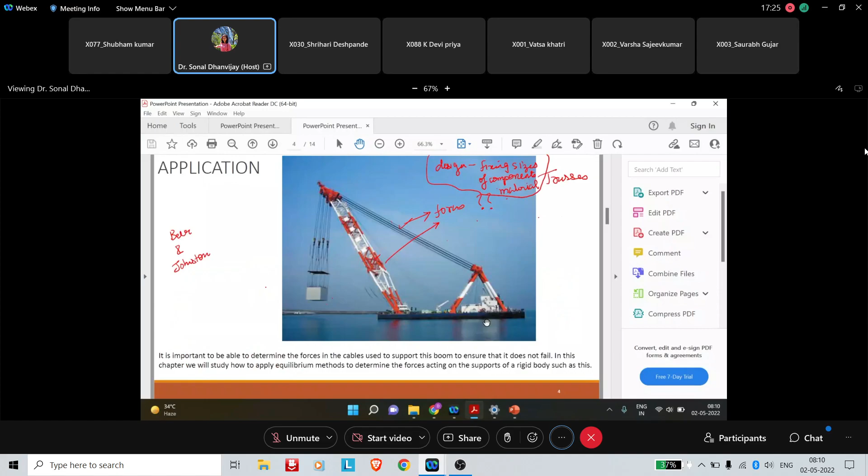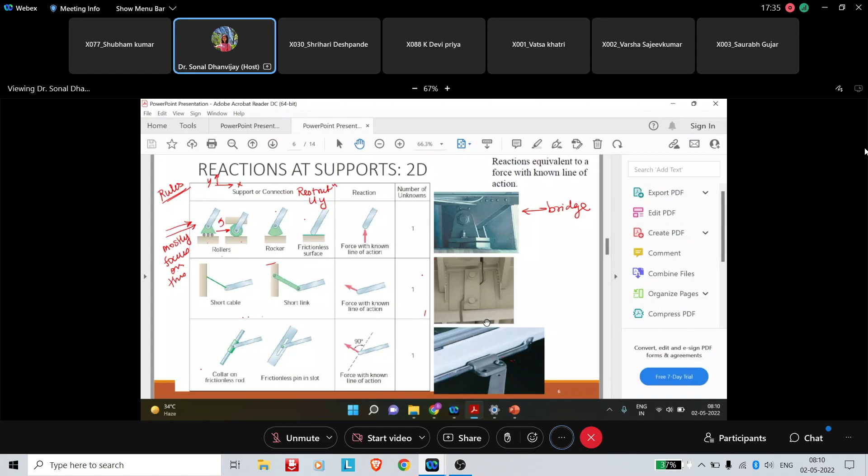Okay. So this is the last lecture. We were talking about equilibrium, equilibrium of rigid bodies. Then we talked about supports. So in 2D, if it is a roller, one reaction. If it is a hinge, then two reactions. And if it is fixed support, then there are three reactions. Okay. So we will try to solve some problems like that.

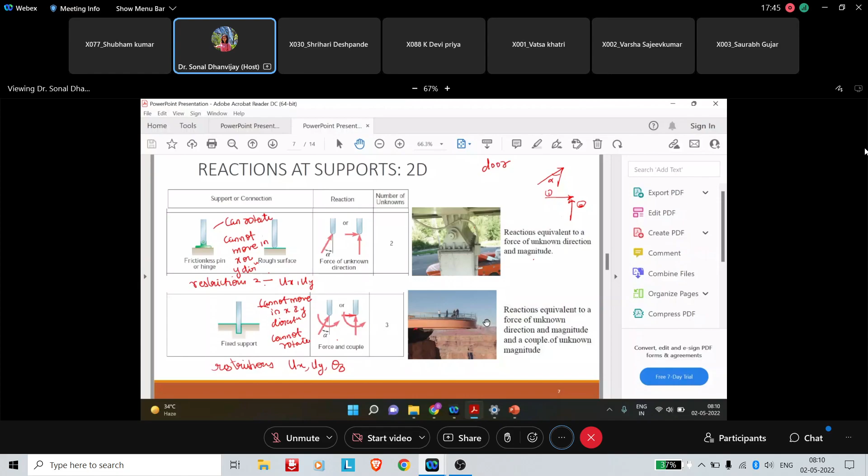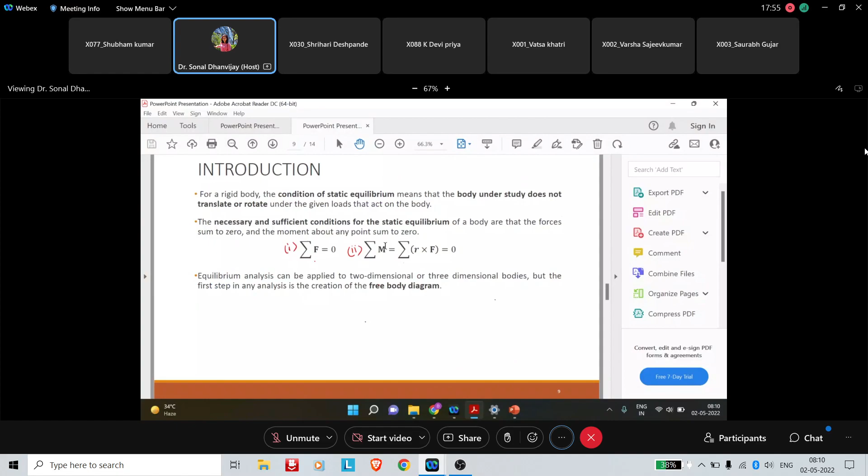So then again, condition of equilibrium, summation of forces equal to 0 and summation of moment equal to 0. Then we talked about how to draw a free body diagram. This free body diagram topic is recurring. Every chapter we will need this creation of free body diagram, and you will learn something new about it every time.

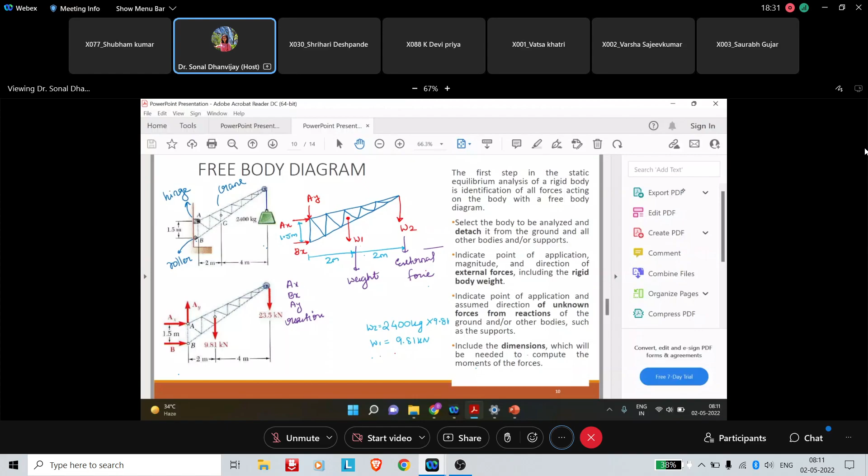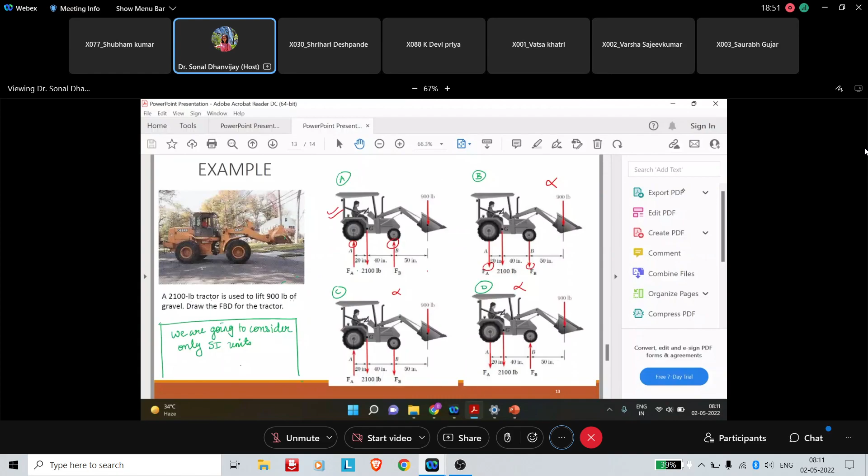So here what we learned is that first you need to detach the body from all the supports, and then you see how many loads are acting. Then you have to add the self weight, and wherever there are supports, you have to replace them by appropriate reactions. This is what we saw last class. And then one or two examples we spoke about how to draw a free body diagram. One of these I had asked you which is the correct one, and this tractor also.

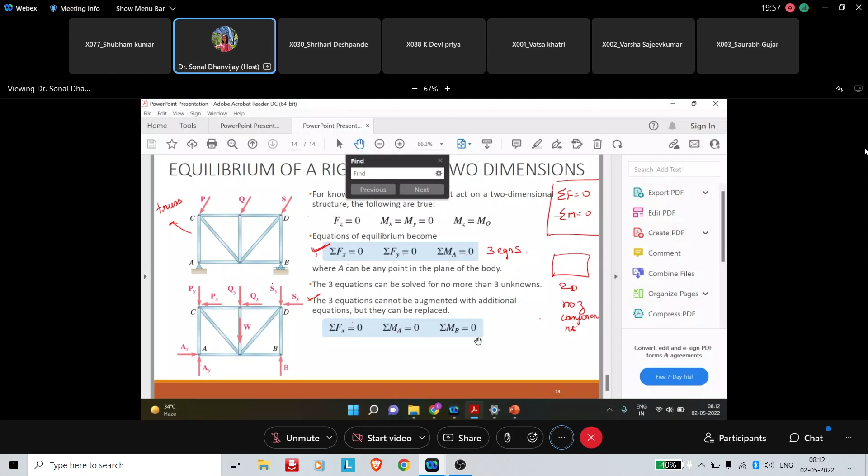If we need to solve for three unknowns, Ax, Ay, and the reaction at B, then you can either use these three equations, or you can even use summation Fy equal to 0 and these. When we come to an example like this, it will be more clear. The point I am trying to make is that you need three equations to solve for three unknowns. Whatever is the easiest and quickest way, that we will follow. So let me take some examples like that.

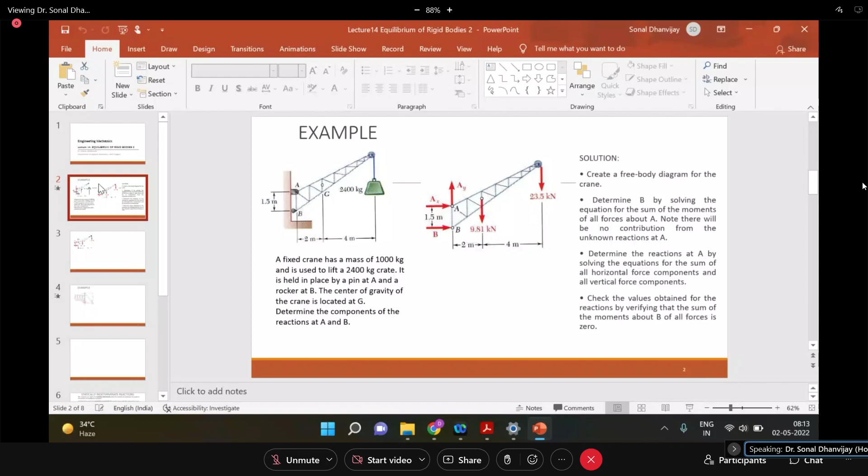What we have here. So last lecture we saw some problems, right? We were just trying to get the free body diagram. For this problem in the last lecture we saw how to draw the free body diagram. So now what I want to find out is: determine the components of reactions at A and B. What is the reaction here and what is the reaction here, the actual values you need to find out. So first thing would be creation of free body diagram, which we already saw how to do.

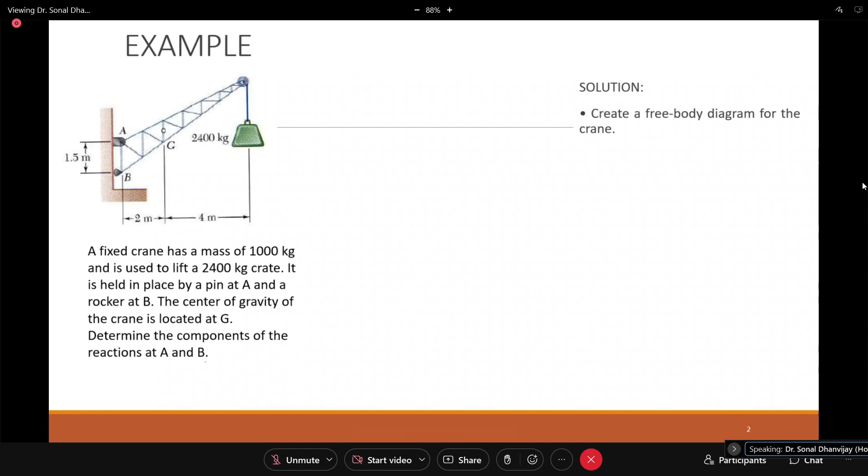Okay. So what is this? Fixed crane has a mass of 1000 kg. Okay, so the 1000 kg into 9.81. So that is kilonewton; in kilonewton you are writing that. And then again, this 2400 kg. So 2400 kg, if you convert it into kilonewton, you will get this value.

Okay, so again, SI units we are using. So it's better if you convert everything to either Newton or kilonewton. So now how to solve this? Either you can take summation of moment of all forces at A equal to 0. Then these two forces AX and AY won't produce any moment at A because they are passing through A. So in that equation you will just have one unknown B, so you can quickly find B. Okay, so there is one strategy like this.

Suppose you take summation of moment at A equal to 0; that will give you reaction at B. Then if you do summation Fx equal to 0, this is known, so only one unknown is there, so this will give you Ax. And then again, if you do summation of Fy equal to 0, this will give you Ay because all the other forces are known. Okay, so this is one strategy. You can even take another approach. Any three equations you can solve, but this is the quickest way to solve the problem.

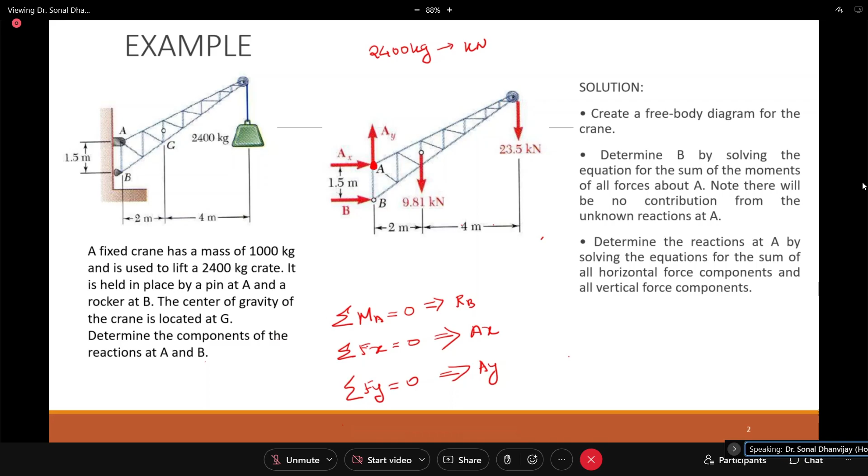Okay, so this you can read later when you go back. Let me just jump into solving the problem. So I want everyone to do summation of moment at A equal to 0 and find the value of reaction at B.

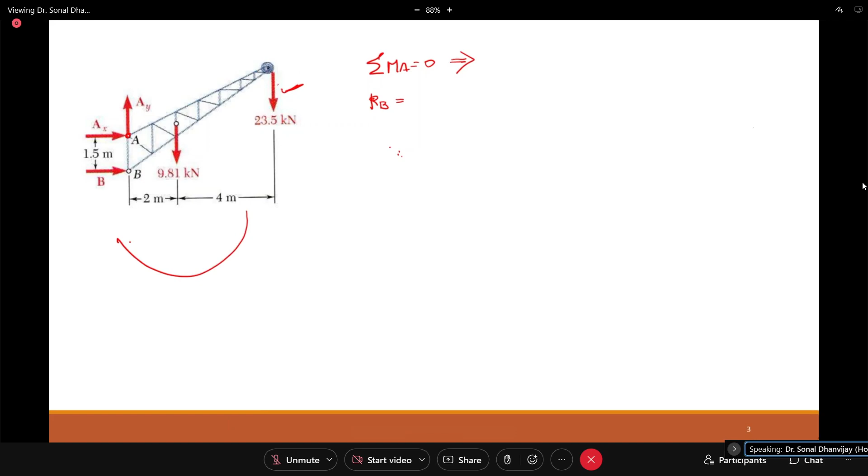I'll do the first one for you. If we do summation of moment at A equal to 0, let us take one force. So this is 23.5. This force at this point is producing a clockwise moment; clockwise is negative. Then force into distance. Distance is 6 meter. So this is for this force. Then take this force; the distance is 2 meter. Again, this force at this point is clockwise, so minus 9.81 into 2. These are the two forces.

Now these two forces won't produce any moment at A because they are passing through that point. Then this one, RB at this point. So it is anti-clockwise, so positive. RB into 1.5. So RB you can find out. Any doubt or confusion you can ask me.

Chalo, calculate this fast. This is a one-step solution. Roll number 91, Srushti, I want an answer from you. Srushti, you there? 92, are you there? Okay, Raghav has sent me one answer. 91, 92, 93, any of you? Please don't be virtually present in the class, otherwise you won't be able to perform properly in the exam. 94, 95 are absent. Okay.

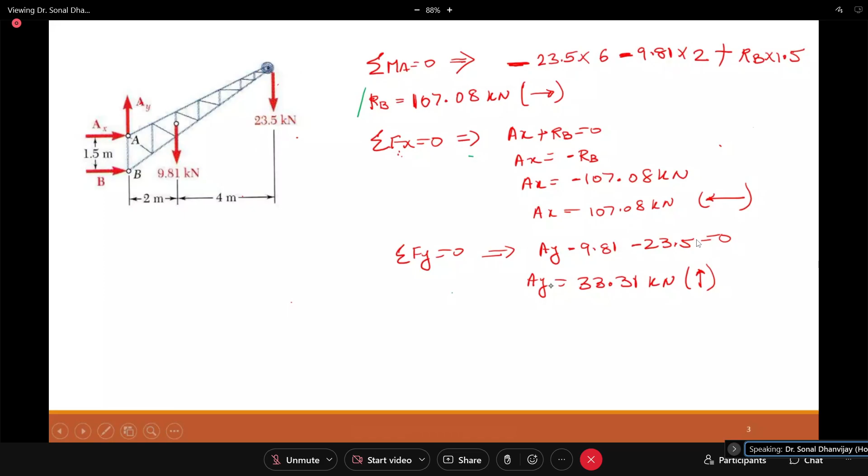Okay, I wanted to highlight this, but somehow my pen is not allowing. Anyway, so this is your answer. This one, and that one. RB, AX, and AY will be your answer because they are asking: determine the components of reactions at A and B. So you have to find how many reactions are there at A and B, however many reactions there are.

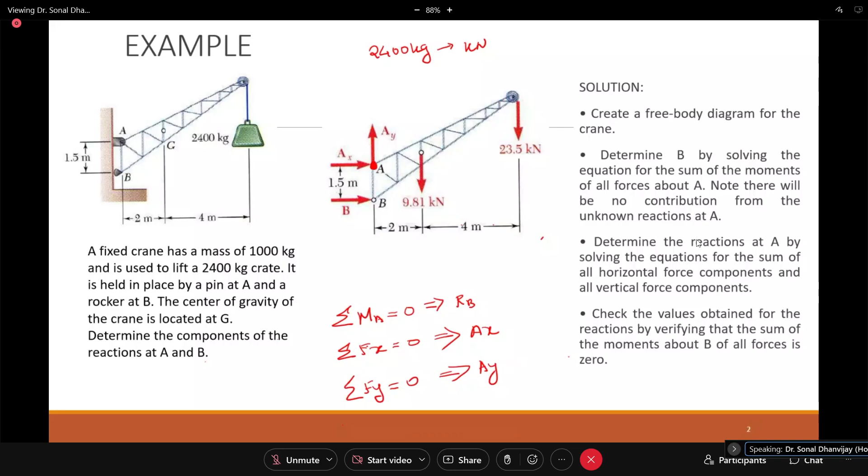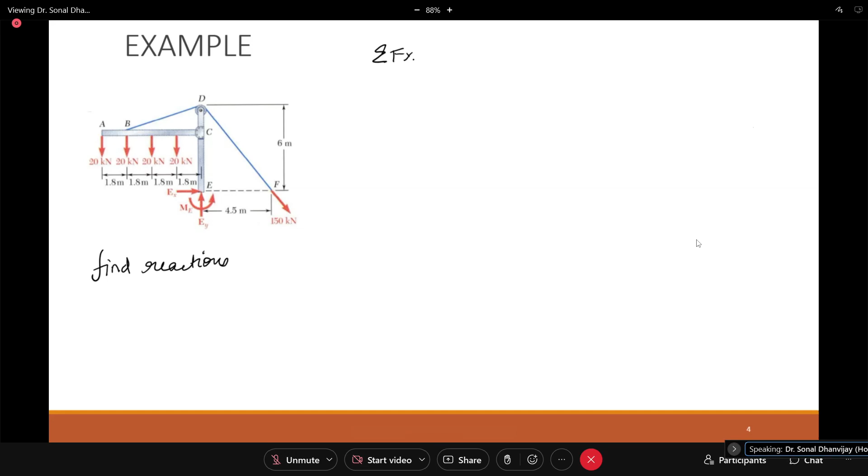If you take summation Fx equal to 0, this will give you Ex, because in the x direction there will be some component of F and that will negate your Ex. If you do summation Fy equal to 0, you will get Ey. And if you do summation of moment at E equal to 0, you will get ME. So you just need to do these three calculations and you can find that.

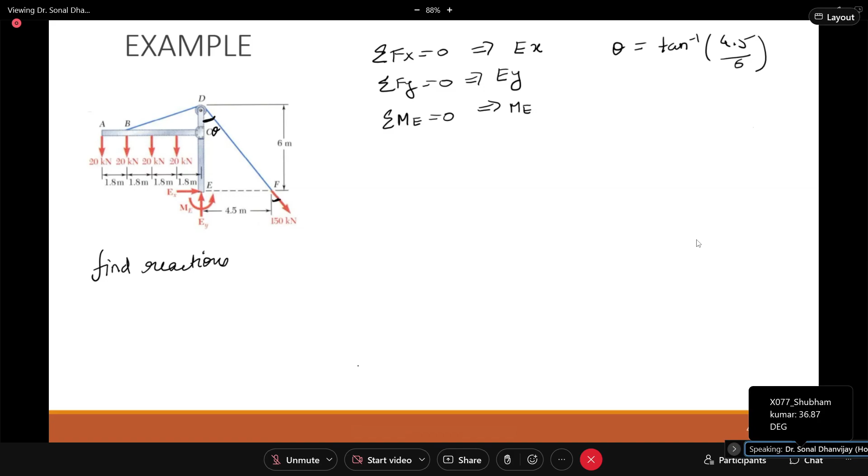So now the first thing here, you need to find this angle. Then only you can go about this equation. You need to resolve this 150. So that theta, if you take this theta here, the same theta will be here. That theta you can take as tan inverse 4.5 by 6. Same theta can be here and then you can find Ex. So 36.87 degrees.

Then you can write this equation for Fx: Ex plus 150 sin theta, so sin 36.87, equal to 0. So the Ex value will come as negative. That means your Ex is towards the left. Then you can simply do summation Fy equal to 0.

If you do summation Fy equal to 0: Ey minus 150 cos 36.87 minus 1, 2, 3, 4, 20 into 4. So Ex and Ey values, you can calculate all three values.

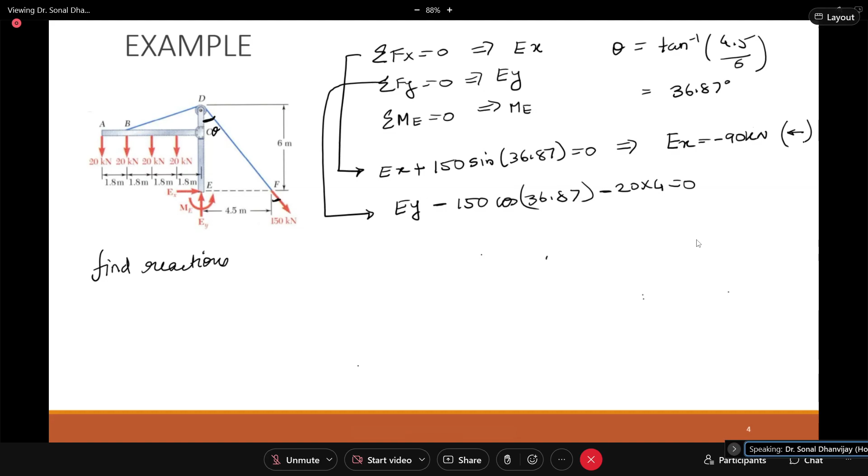Ex, you are telling me it has come as 90. So Ex is equal to minus 90 kilonewton. So this is like that. Ey, you are telling me 200. And it is not negative, right? So it will be up.

Then moment at E: ME is 180 kilonewton meter. So this is coming as positive, right? 180 kilonewton meter is coming as positive, then you can just write it like this. You can write it is anti-clockwise, or you can write it in full also, anti-clockwise.

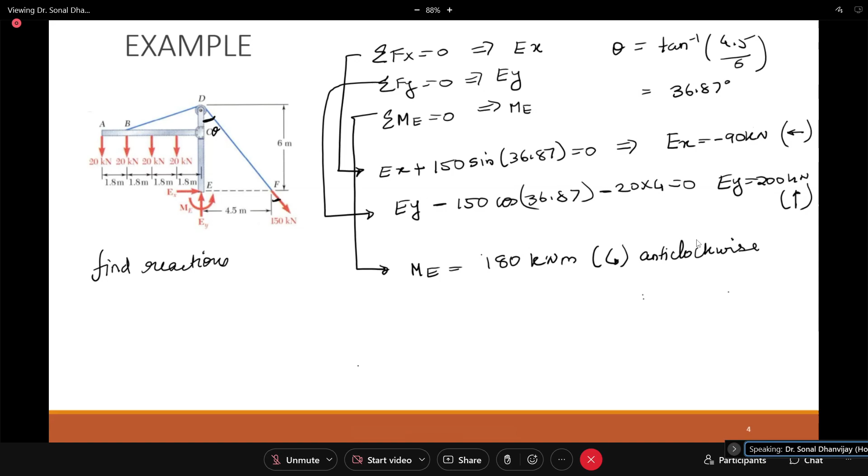So in the exam, even in a lesser time, you need to find out these reactions. So please practice this. I'll take one more practice example. Let me just see what I have here. Okay, before that, let me introduce one concept to you.

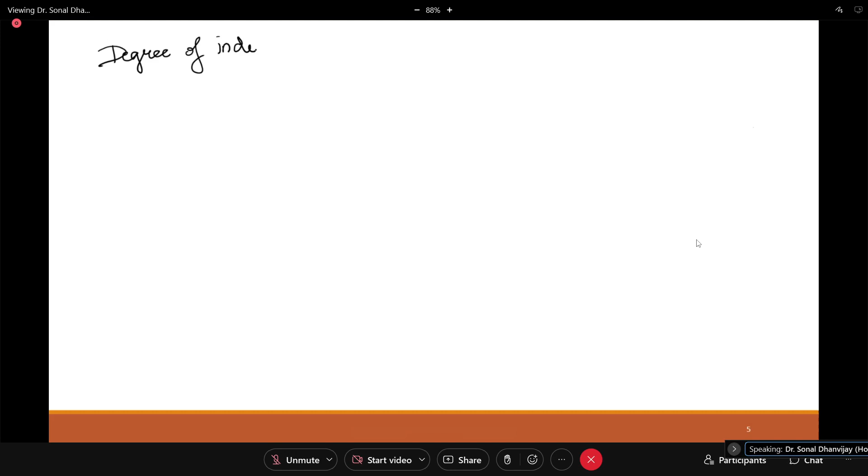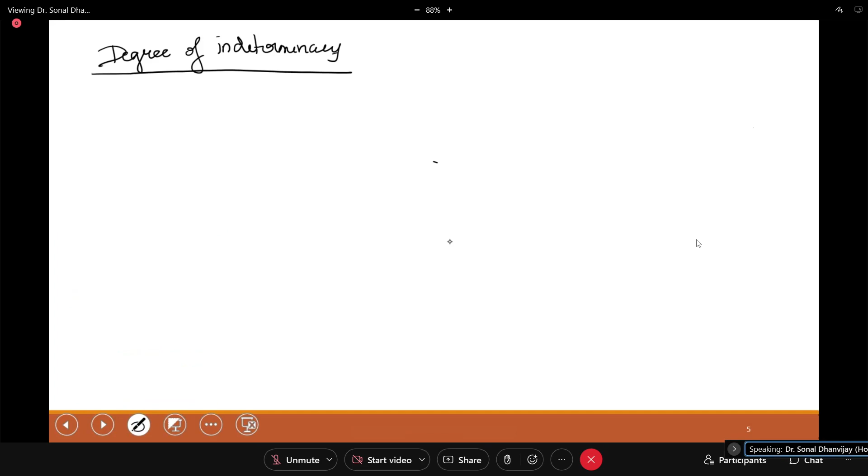So there is this concept of degree of indeterminacy. We will come back to this one more time when we talk about trusses, in chapter 8 or 9, but at this point you should be aware of what this is. So degree of indeterminacy of a structure is number of unknowns minus number of equilibrium equations.

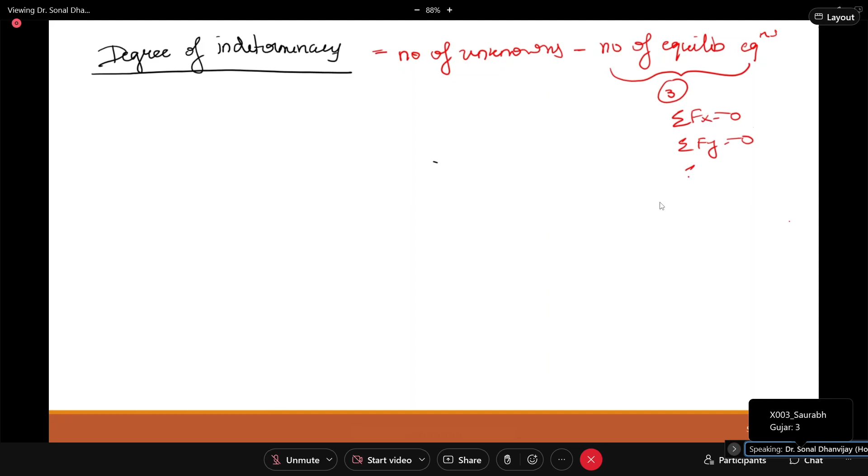So in 2D, how many equilibrium equations do we have? We just discussed it. We have 3: summation Fx, summation Fy, and summation of moment at any point. Or sometimes you might use summation of moments at 2 points and only Fx. They are variable, but only 3.

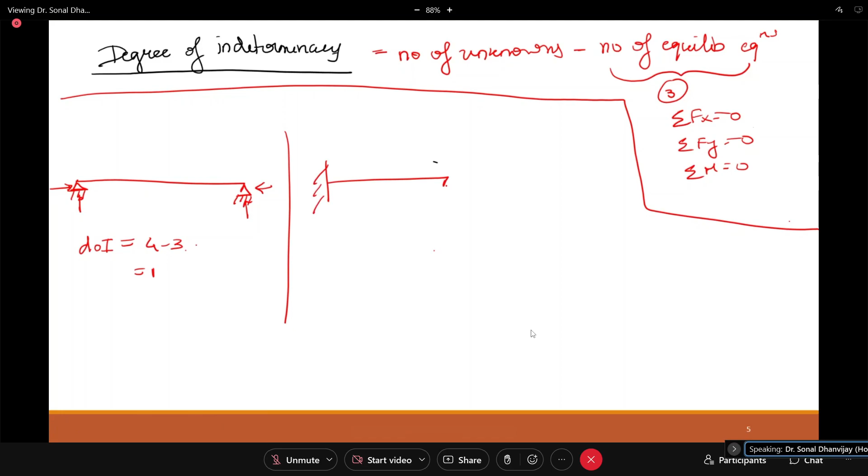So from this definition, if I ask you, these two are hinge supports. So what is its degree of indeterminacy? I am just calling it DOI. 1. Yeah, because there are two reactions at each support, so 4 minus 3, that is 1. Suppose this is a fixed support and there is a hinge. Then 2.

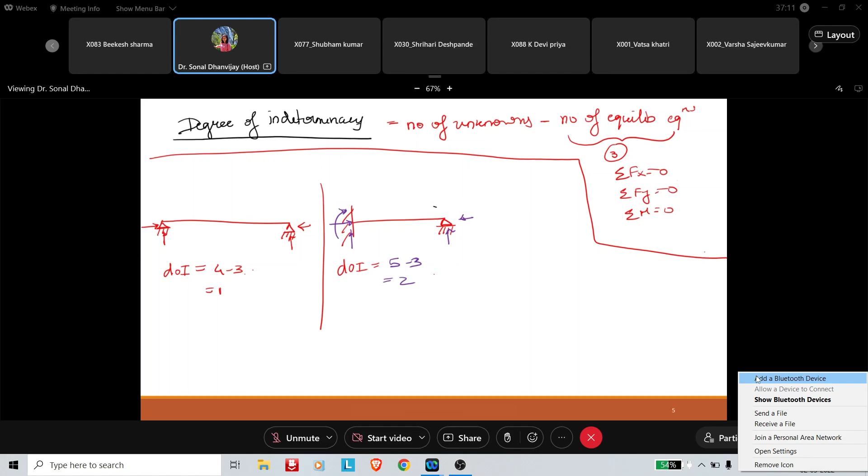5 minus 3, that is 2. Because 1, 2... structures. Okay, these two are indeterminate because the number of unknowns is more than the number of equilibrium equations. So we are lagging behind the equilibrium equations. In this case, if I somehow get one more equilibrium equation, then I will be able to solve the problem, in the sense I'll be able to find the reactions. In this case, if two more equations are available somehow, then I will be able to find the reactions.

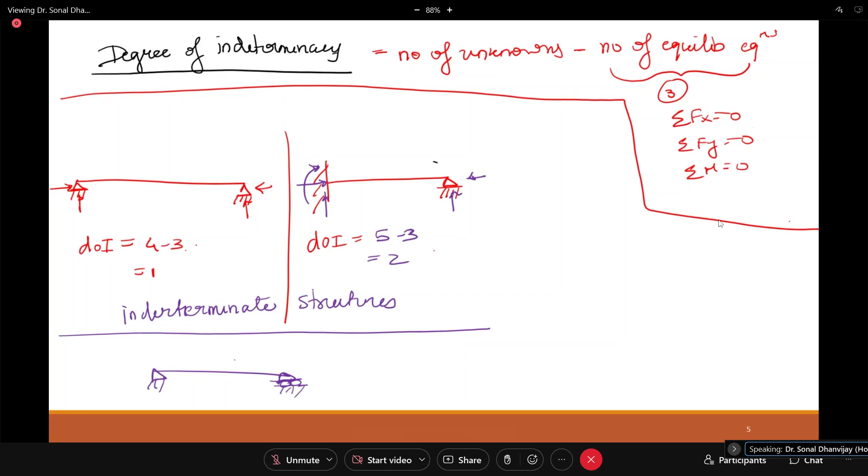So these two are indeterminate beams, or indeterminate structures. So usually in our case we will be solving some problem like this. Here, what is the degree of indeterminacy for this problem I have drawn? There is a roller, there is a hinge. 0. Okay, that means this is determinate. You can even talk about this: if this is a fixed support, a cantilever, with no support here. So these two are determinate structures, and these are in our scope. Indeterminate structures are not in the scope of your syllabus, but at least you should know what determinate and indeterminate structures are.

Whenever we want to solve indeterminate structures, that means we want to find the unknown reactions, more equations are needed. Here one more equation is needed. Here two more equations are needed. Those are called compatibility equations. In your higher semesters, you will learn more about that. But for the scope of this syllabus, we are going to focus only on determinate structures.

Yes, there was some question. Ma'am, I didn't understand the fifth unknown. That is moment. You understood that if the number of unknowns is more than the number of equilibrium equations, then the structure is indeterminate? Understood, ma'am. Okay, so where are you having a problem, this fixed one or the second one? The second structure, ma'am. Okay, 5 minus 3.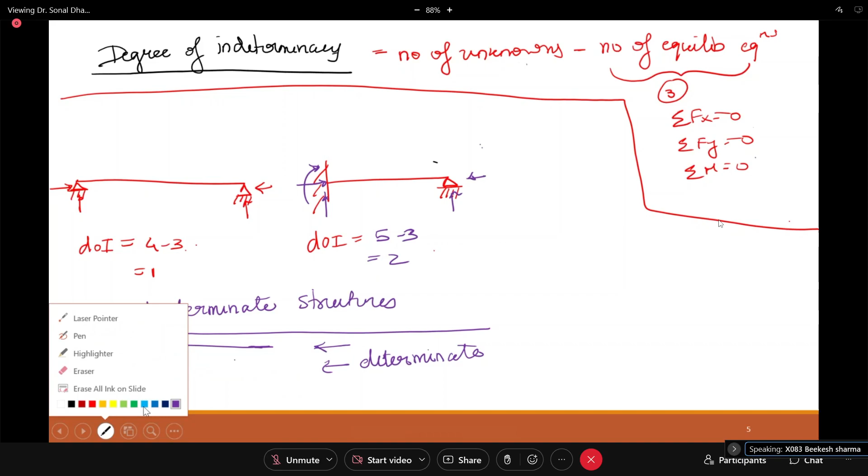Here this is a hinge and this is a roller. At the hinge there are two reactions, 1, 2. At the roller there is one reaction. So our DOI is number of unknowns 1, 2, 3 minus number of equilibrium equations, which in 2D will always be 3. 3 minus 3, that is 0. Not this one, ma'am, the upper one. Okay, the upper one. For this one, it is 1, 2 and 3, so 3 reactions, 3 unknowns, 3 equilibrium equations, DOI 0. Whenever there is a fixed support, you have 3 reactions.

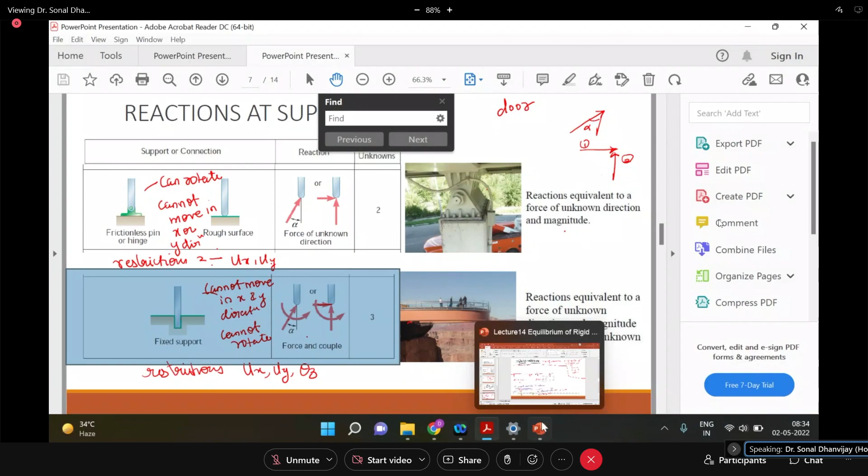So whenever there is a fixed support, there are 1, 2, 3 reactions. Do you understand this? No, ma'am. We discussed the same in the last class also, right? Just 1 minute. This is a fixed support, so here it is fixed. Whenever there is a fixed support, there are 3 reactions, 2 forces and 1 moment. The fixed support is usually represented like this.

Whenever it is like this, this is a hinge. A support like this is a roller. This support is fixed, so there are 3 reactions. Here there is a hinge, so there are 2 reactions. So 1, 2, 3, 4, 5, total 5. And the number of equilibrium equations in 2D will be only 3. So 5 minus 3 is 2. Understood, or is there some more confusion? Understood, ma'am.

So where was I? I was telling you that in your first year engineering mechanics syllabus, we will be considering only determinate structures, meaning the number of unknowns will always be equal to the number of equilibrium equations. That way you will always be able to solve the problem completely, in the sense of finding the unknown reactions. In this case, we need one additional equation because there are 4 unknowns and only 3 equations. In this case, we need two additional equations. Those additional equations usually come from the conditions of compatibility. So it is not that the problem is not solvable.

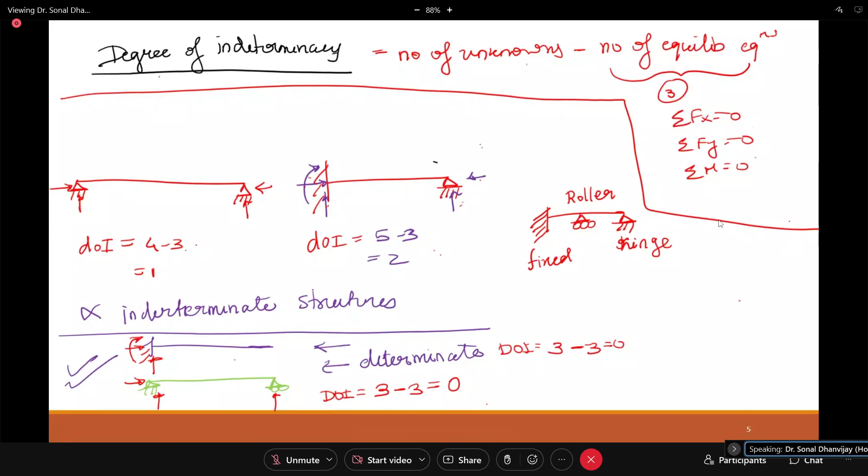Statically indeterminate reactions. So you can say the structure is indeterminate, or we can use the similar terminology, statically indeterminate reactions. Reactions are said to be statically determinate when the number of unknowns is equal to the number of equilibrium equations. This topic might be a bit confusing for you.

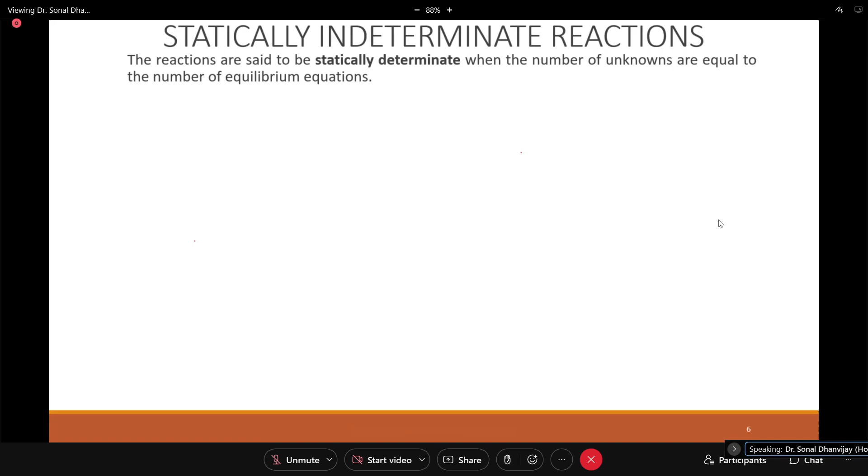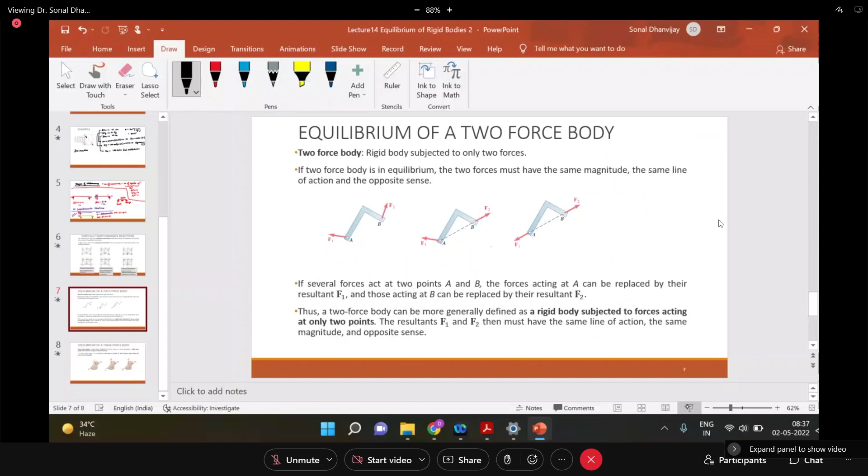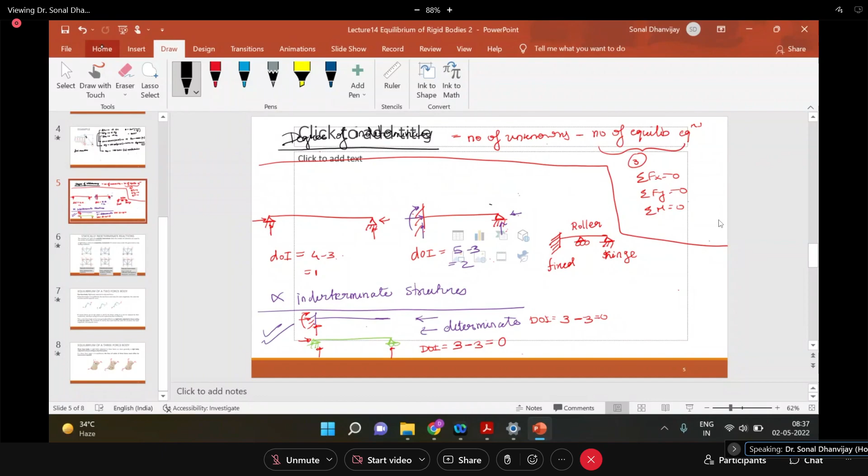Okay, I'll come back to this slide after some time. I don't want to confuse you. Let us focus. While we are on this, let me take one or two problems, so it will be easier for you. Because if I talk about the constraints, you might get confused. So let me tell you something else first, then we can come back there.

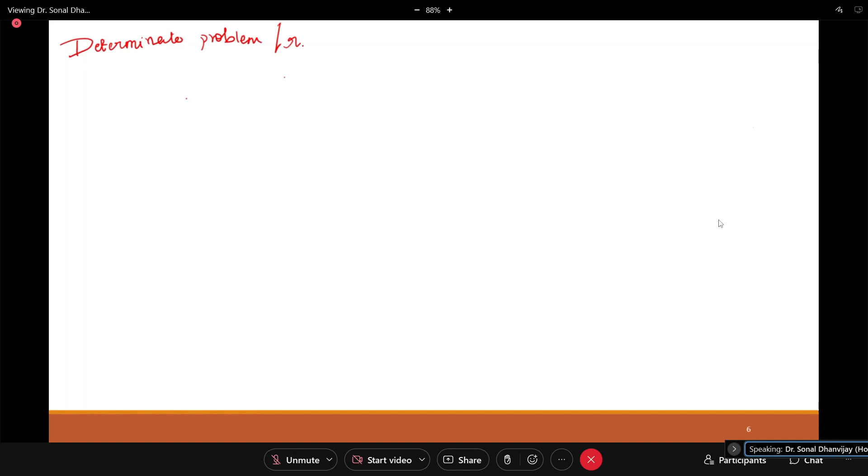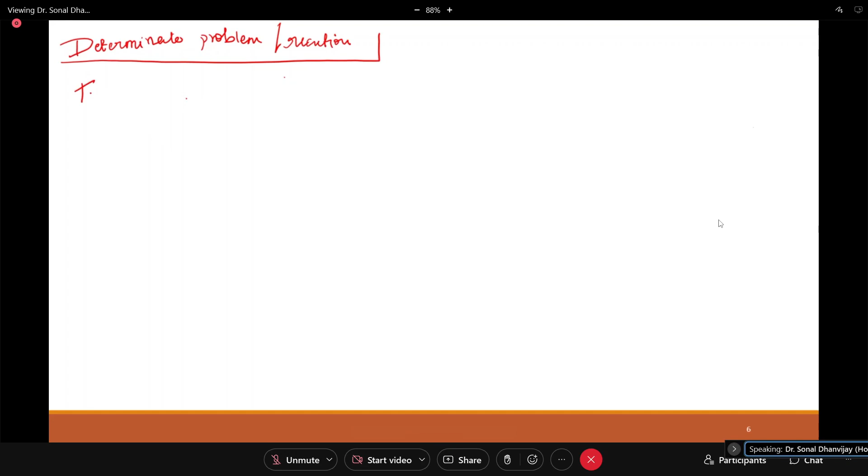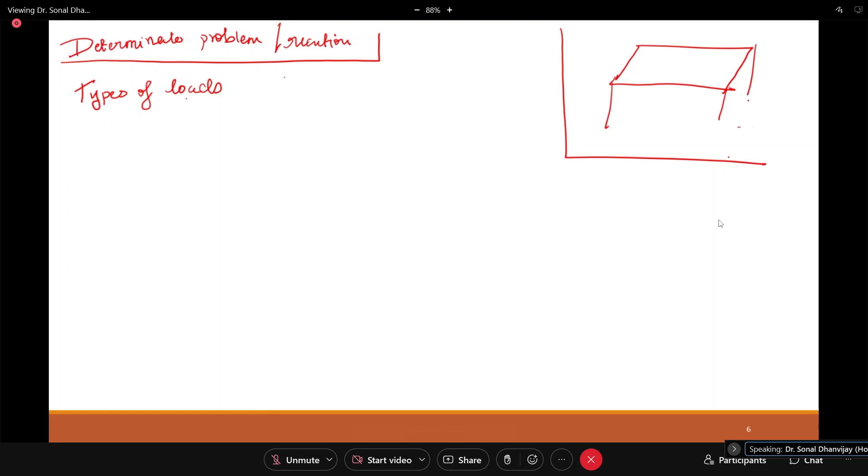So let us say we are talking about a determinate problem, or determinate reactions. That means you are able to find out all the reactions. In this, there are many types of loads also. You remember in the last class we talked about a structure with beams and columns. So this is a fixed support. This is a beam. This is a column.

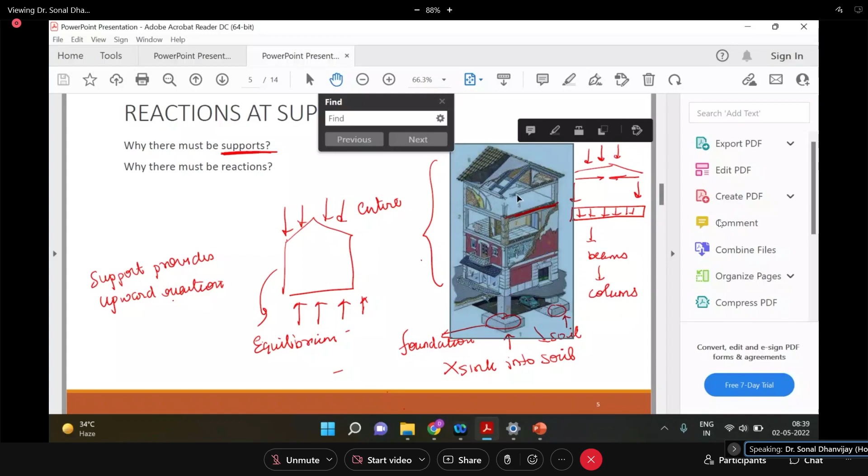I was telling you about this. So there is a roof here, then there are beams, then columns. So there is a slab, at least in any house where you are sitting right now. There will be loads on the slab. Then the loads will be transferred to the beams, then to the columns, then to the foundation. So there will be some loads on this slab.

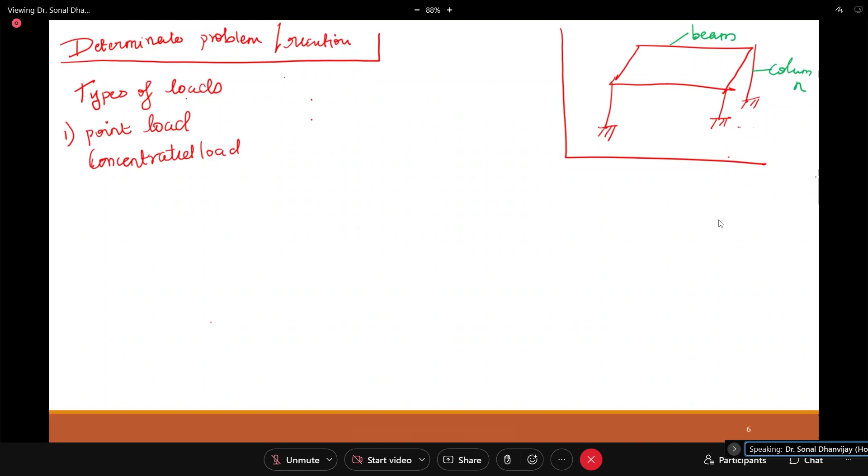For our simplicity, we classify the loads. One is a point load, or concentrated load. It will be represented by just a point, and the unit will be kilonewton or Newton. Second, there is the uniformly distributed load, which we also call UDL. It is usually represented like this, and if it is W, the unit is kilonewton per meter or Newton per meter.

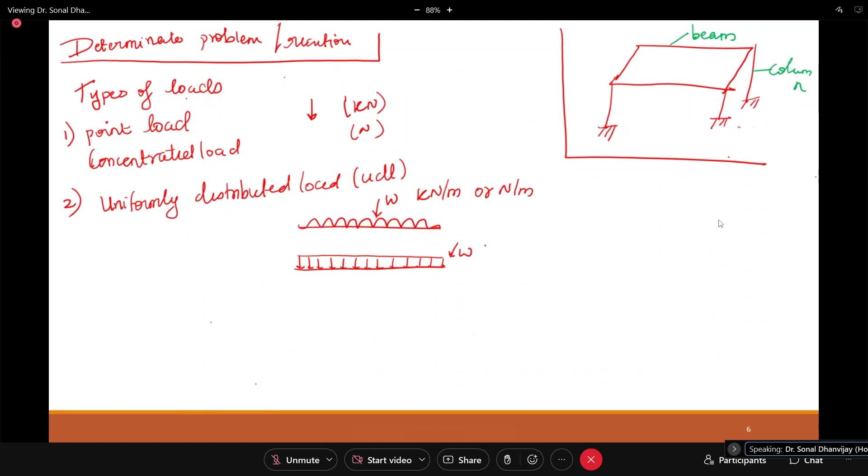Let me first talk about units. So this is UDL, and another way of representing it is like this also, uniformly distributed over some length. Again, this will be W, kilonewton per meter or Newton per meter or Newton per mm, something like this. Load per unit length.

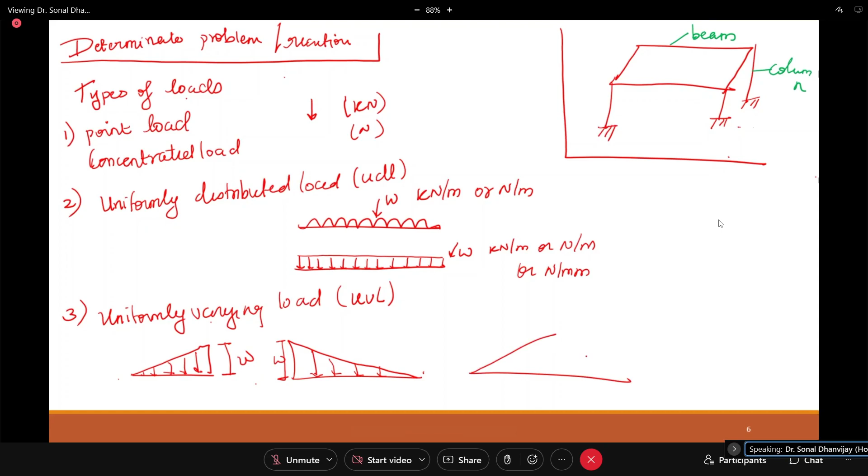Then there is a third kind of load, the uniformly varying load, which we call UVL. You can represent it like this: here the intensity is 0, here the intensity is W. So this ordinate will be W. Or your UVL can be any other kind, where the right side is 0 and here it is W, any combination. Here the ordinate will be given as W.

Just to give you some physical significance: if a very heavy almirah is kept here, it will introduce a point load. The uniformly distributed load is due to the dead weight, the dead load. Suppose the slab is made up of some bricks; the load by these bricks will be like that. And the UVL can be any kind of loading, usually wind; the distribution is like this.

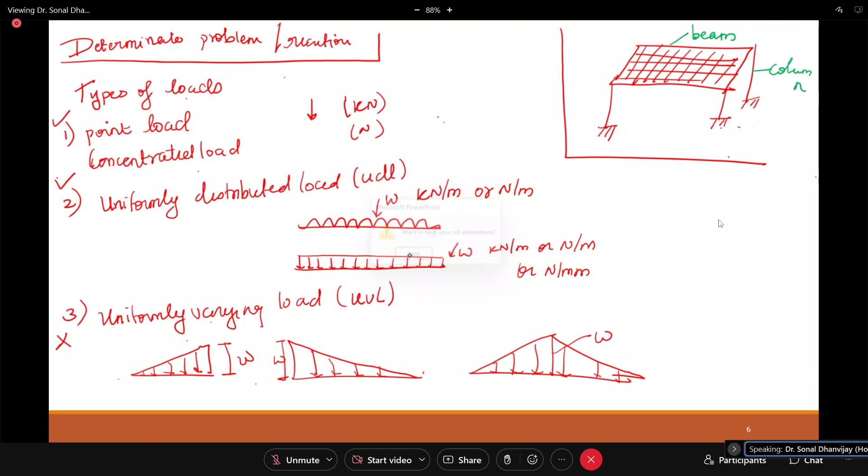Again, these are topics of your higher semester, but at least you should know which kind of load is coming. It is in your syllabus. We don't usually ask questions on UVL, but you should know the difference between UDL and UVL. Now let us move one more step ahead. Suppose I give you a very simple example. So this is a beam.

There is a roller here. Then there is a hinge here. Suppose there is a point load here and there is a point load here. 2.7 kilonewton. This is 70 kilonewton.

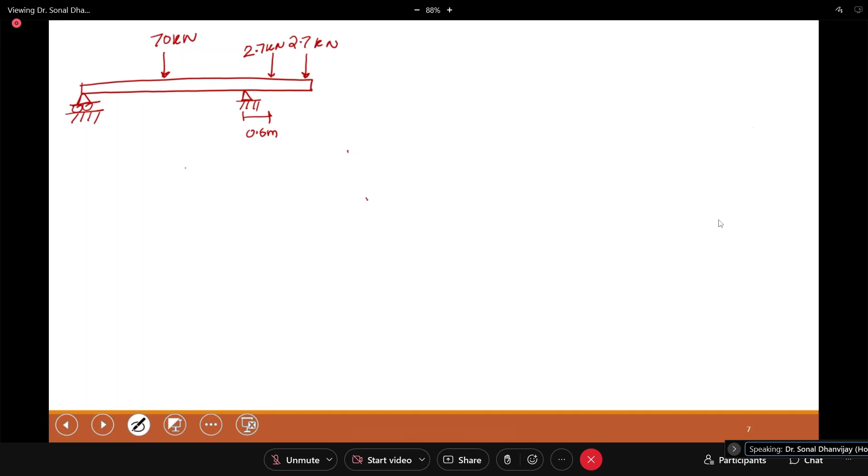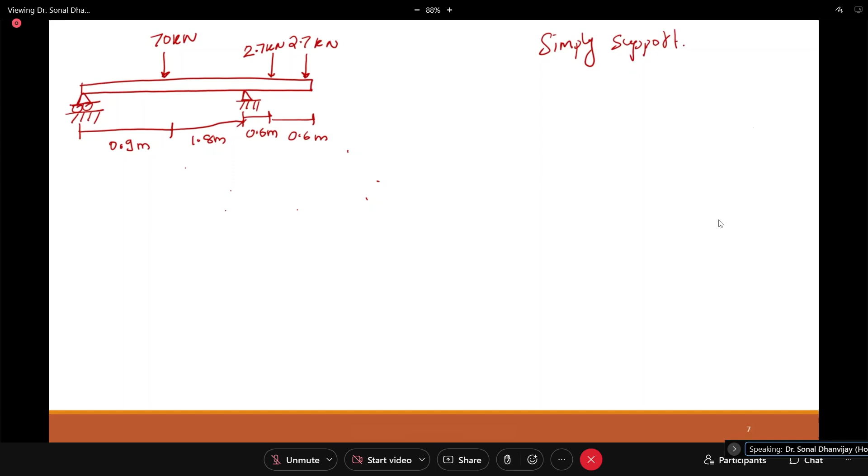Say 2.7, same point load, and then you need the distance. 0.6 meter. 0.6 meter from here, sorry. From here to here, 0.9 meter. From here to here, 1.8 meter. Okay. Now, this is a simply supported beam with overhang.

Why am I taking overhang? This portion, from here to here, is an overhang portion. Okay. So this is just the terminology which we are using. Now you find the reactions. Simple approach. You can take summation Fx, summation Fy, and summation of moment at some point.

So here, if this is A, this is B, and you can draw another figure. I am drawing on this only. So this is a roller, so one reaction Ay. This is a hinge, so By and Bx. Because it is a hinge, there will be two reactions. Now, if you take summation Fx equal to 0, what is the value of Bx you get? 0. Because there are no other forces in the x direction, Bx is 0.

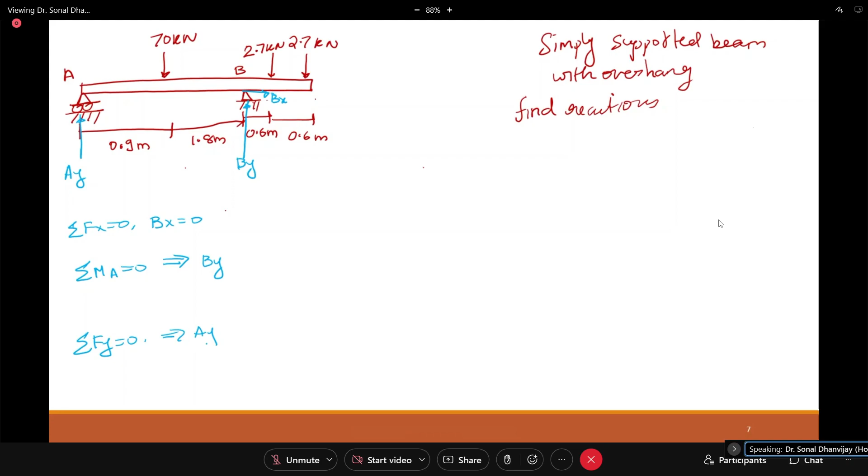Now, suppose you take summation of moment at B equal to 0, or summation of moment at A equal to 0, any point. So Ay won't produce any moment here, so there will be only one unknown in that equation, and you can quickly find By. So summation of moment at A equal to 0 will give you By. Then summation Fy equal to 0 will give you Ay. So please calculate the values. If you have any confusion, you can stop and ask me.

So we are just trying to find the reactions now. Okay, Ay is 44.87. By is 30.53. Shubham has given a correct answer. What about others? Is there anyone who doesn't know how to solve this problem? Feel free to ask me. I'm assuming by this point you have got a hang of it. Basically, you just have to sum the moment of all the forces at A equal to 0.

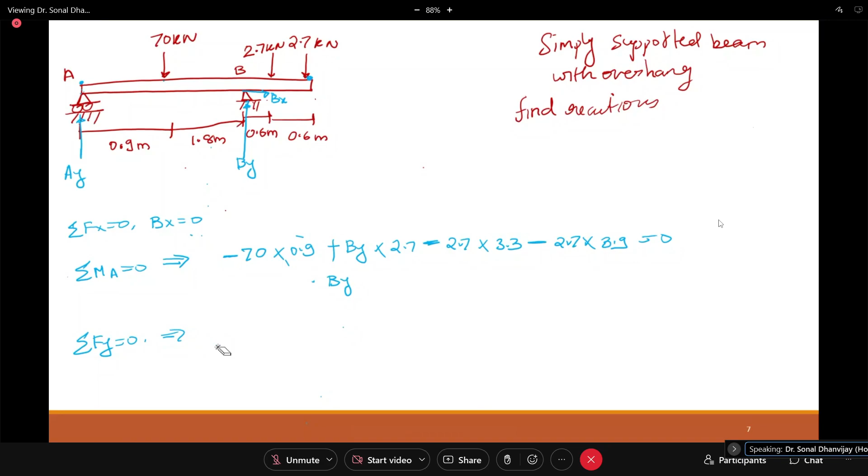3.3 plus this entire distance, because moment is at A and the force is here. It is the distance between the point of application of the force and the point at which moment is taken. So that is 3.9, equal to 0. This gives you By, and Ay is then from the third equation: minus 70 minus 2.7 minus 2.7 plus, I'm so sorry.

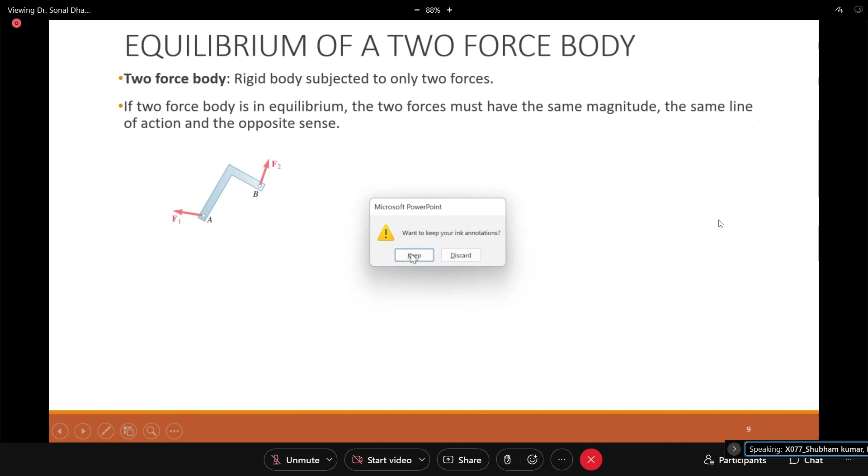There might be a calculation mistake. Plus Ay plus By. Here we know By from the top, so only Ay is remaining, so you can calculate Ay. Ay is coming 44.86. 44.86 kilonewton, and By I got as 30.53 kilonewton.

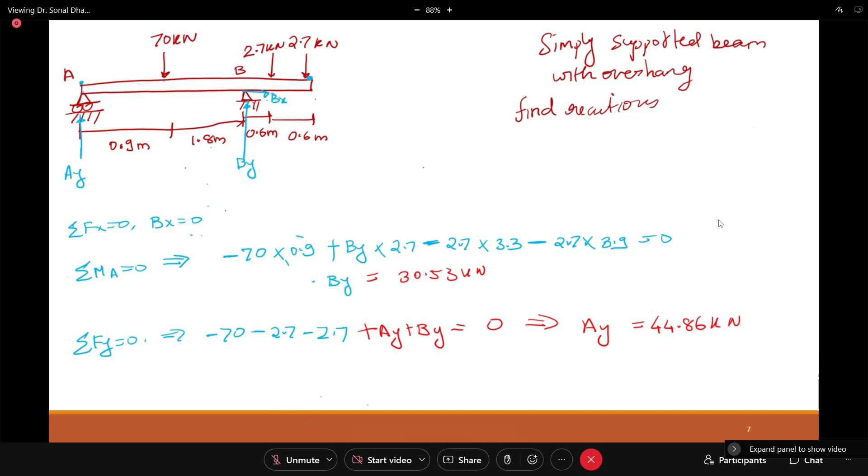Okay, so I am hoping everybody got this. Any more confusion? Anyway, let me move forward. I want to finish one more example. You can go and check these calculations. Two, three students are not getting the correct answers. You can go back and check. I'll just take one more example like this.

We talked about UDL, right? UDL. Okay. So suppose,

Am I audible? I am having some network issue. Am I still audible? Yes, ma'am. Yes, ma'am.

Not audible, ma'am. Some network issue from my side. Okay. Can you hear me now? Yes, ma'am. Okay. Some issue was there from my side. How much time we have?

Acha, let me at least introduce that problem. You can do the calculations at home. Let me see if I have that here. Okay, I don't have any problem like that. Let us try to find some example. We can just talk about it.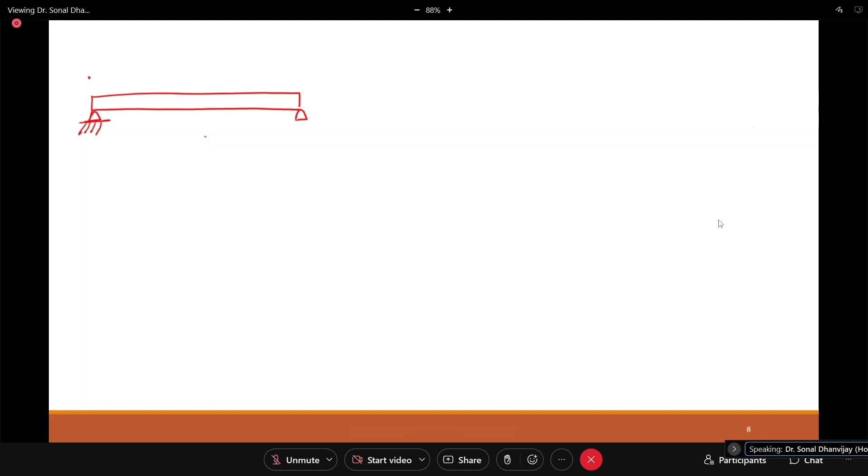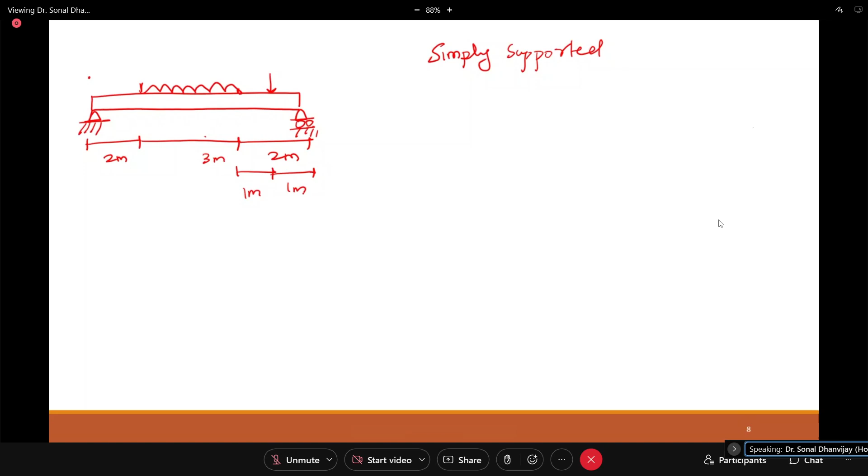So suppose this is a beam. Let us take a very simple beam. This is again simply supported: one end hinge, one end roller. Suppose this is 2 meter, this part is 3 meter and this part is 2 meter. And from 2 to 5 meter, there is a UDL. And here, at 1 meter, there is say 20 kilonewton load. And this UDL is 15 kilonewton per meter.

Now you have to find the reactions. Please remember, we are just trying to find the reactions now. Suppose this is A, this is B. So this can be AY, this can be AX, and this can be BY. Now the new thing here is this UDL. This UDL is 15 kilonewton per meter, and it is distributed over this 3 meter span.

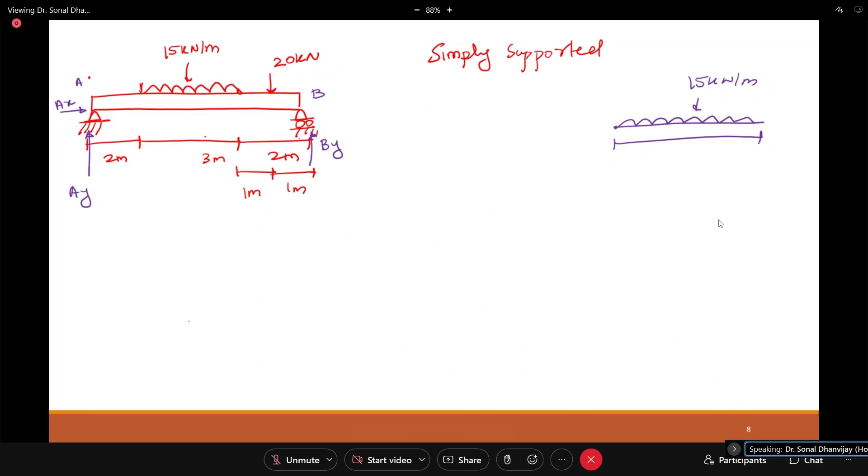So what is usually done is we consider that its effect is at the center, so you replace it by a point load. So this will be the center, 1.5 meter, 1.5 meter, and that point load intensity will be 15 into 3. So that will be W into L. Anyway, let me draw it one more time here.

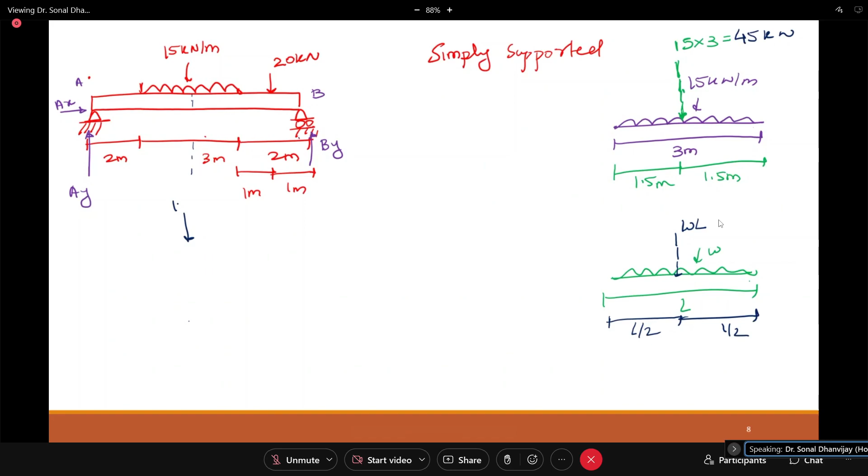So whenever there is a load, this is W and this is L. You can replace this by a point load acting at the center. This is W into L, that will be the point load, and this will be acting at a distance L by 2. So this 45 kilonewton will be acting here at the center. Just for simplicity, I am writing it here: this is 45 kilonewton, and it is acting here.

Suppose this is 2 meters, so this will be 1.5. And then this is 1 meter, right? Here we already have a load of 20 kilonewton. So this is 1.5 meter, this is 1 meter. So the UDL problem you have converted into a problem where there are 2 point loads. So this problem you know how to solve. Now there is AY, AX, and BY. Forget about the top problem; 15 becomes the 45.

So again, you can take summation of moment at A equal to 0. That will give you BY. If you take summation Fx equal to 0, this will give you Ax. And if you take summation Fy equal to 0, that will give you Ay. So instead of solving this problem, we are now solving this problem. It is not always necessary to draw the bottom diagram again. You can even make all the calculations in your head.